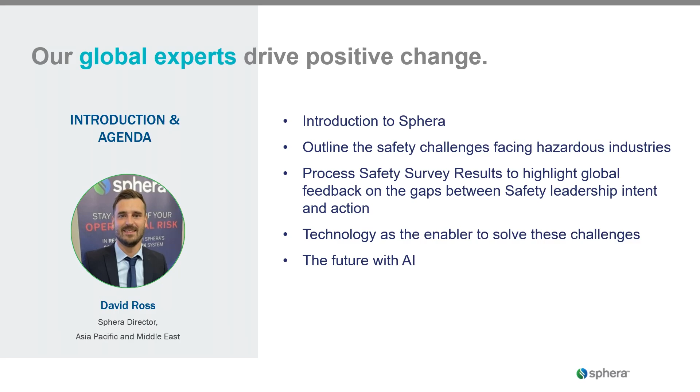And then, where our background is in technology, how we can help enable and address some of those challenges. And then where everyone's looking now, what's the future of process safety and AI? So I want to cover that.

So who are Sphera? Sphera is a leading provider of integrated operational risk and sustainability software. And we're not just a shiny software company. We also have a lot of people with expertise that have come from operations, maintenance, health and safety backgrounds, so we have a lot of data built into the software and services and consulting teams as well. We're not just a tech company, I guess.

So our area of focus: a lot of the companies you speak to here, and at this event as well, are around the maintenance and asset management side. We come at it from environmental health and safety into operations and maintenance. And so we've got solutions across all environmental health, safety, and sustainability, as well as product stewardship and chemical management, supply chain solutions as well for risk to supply, and also my area of focus, which is process safety management solutions.

So I thought I'd start with a quick reference to what is process safety. I'm sure you probably know this, but the Centre for Chemical Process Safety gives the definition of a framework for managing the integrity of operating systems and processes handling hazardous substances to ensure you apply good design and basically don't blow up your plants and your mines and your factories.

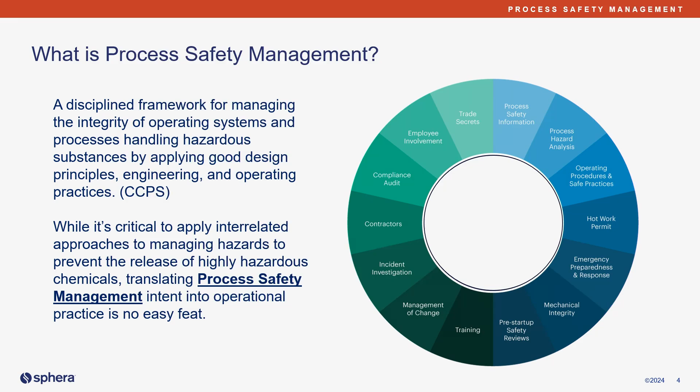So this number of elements changes depending on the institute. WorkSafe have theirs, NOPSEMA have their standards, OSHA, CCPS, Energy Institute. But generally, they form around these key components: being able to do proper hazard identification and analysis, standard operating procedures and practices, permit to work, managing the integrity and reliability of the plant, emergency response, MOC, incident, contractor management, and these are all themes you're seeing across the event, and I want to talk about today.

So the challenge is, though, when it gets into operations, everything changes, and I quite like the quote that since the day that you start operating, the last time you did a PHA or a HAZOP is already out of date. As soon as you get into operations, you start introducing preventative maintenance, critical break-in work, inhibiting safety critical equipment to do work in the site. Things fail, and you have to have management of change in place.

So things are always changing, and I feel we manage these processes in different places. Some on paper, some in point solutions, technology, and it means there's no real visibility across the operation and maintenance teams of what really the status is at any one time and what's the risk.

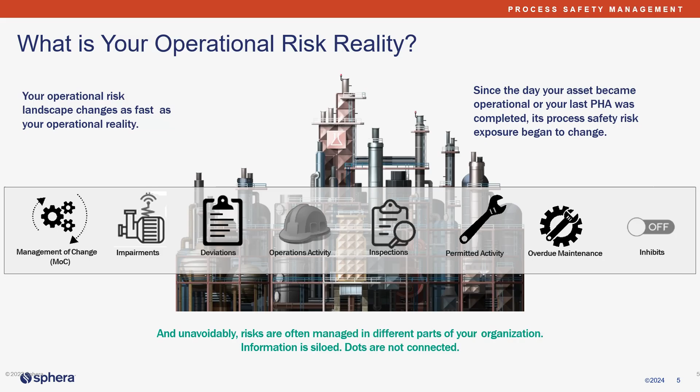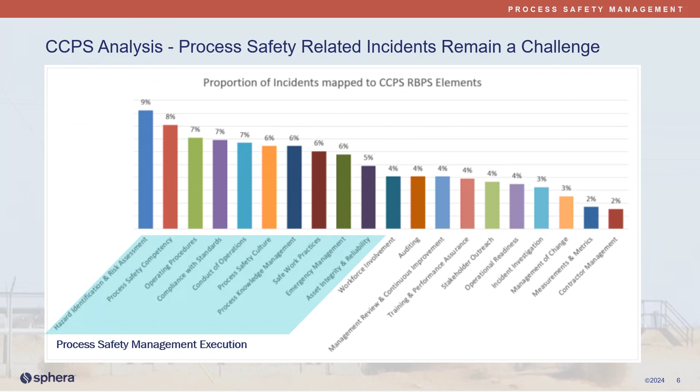So that's one of the challenges, and I was looking at the CCPS recent results that they'd put in terms of incidents and process safety incidents, and you can see in how we manage process safety some of the key factors that were found: hazard identification, risk assessment, so failures in that, in how we operate, competency of the workforce, safe work practices, asset integrity, reliability. So all of these themes we talk about, still we see incidents in this space, even with lots of technology and lots of things nowadays.

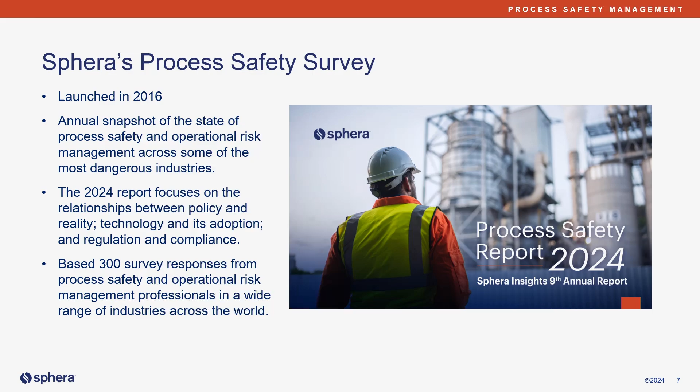Sphera, every year since 2016, have produced an annual report. So we interview hundreds of senior leaders within our client base across mining, utility, energy companies, oil and gas, petrochem, all hazardous industries, rail, and we get some interesting feedback, and over the years it hasn't changed a whole lot. What we find is that in process safety management, what we say we're going to do as an organization isn't then what we do in practice at a top level.

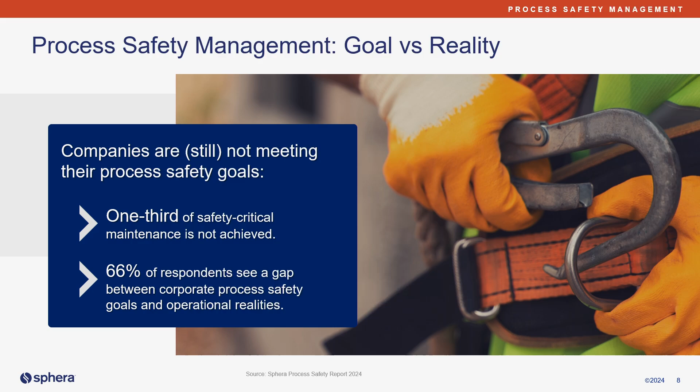So a couple of key highlights: 1/3 of safety critical maintenance is not achieved as a standard across what we heard, which is quite scary when you think about the hazardous facilities that we run, if a lot of the safety critical maintenance hasn't been done. And 66% of the respondents, so the majority, said that there's a gap between what their corporate process safety goals are and the actual reality in operations. So again, what we say we want to do is very different to what we do.

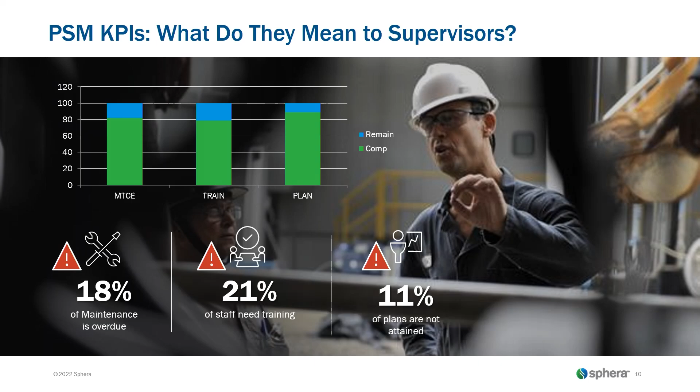And then if we take that down even more to the front line, the guy actually at the site, he might be out doing some hot work, spark potential, and he doesn't know that the gas detector hasn't actually had its maintenance, is overdue, or it's failed inspection. He might not be trained in the safety protocol during an emergency, and he's under pressure to perform tasks quicker. So very quickly, when you drop down a few levels, you can see that this is why we can potentially have incidents, because it's not as green as it looks from a top level.

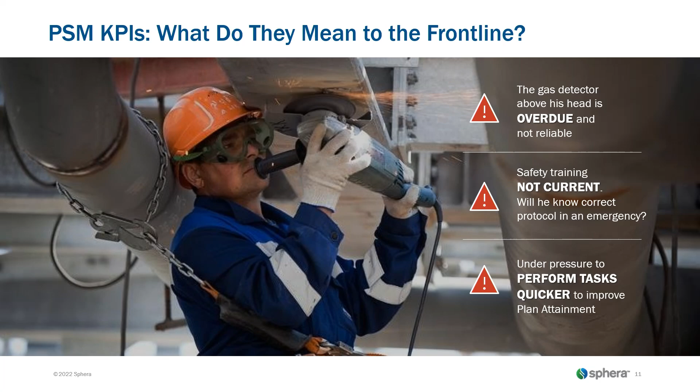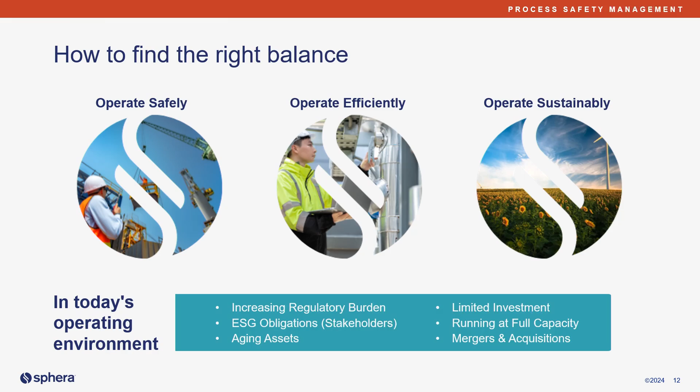And there's lots of reasons for this, and part of that is trying to find a balance between making sure you're producing all the time, I guess the main one, but then operating safely, efficiently, and sustainably. And the challenge in doing that is today's environment. We've got aging assets. There's this whole skills gap with lack of investment, and lots of experienced people leaving, new employees coming in, and trying to capture that knowledge. There's lots of mergers and acquisitions across all the industries, which brings its own challenges across data and systems. And increasing regulatory burden. So things are running at full capacity. It's not easy by any means to manage this.

Some of the key factors within our survey we found when it comes to what causes risk to increase in your plant: I mentioned loss of experienced personnel is a key one. Trying to capture that knowledge and retain it is a challenge. Conflicts between procedures and frontline work, inaccurate standard operating procedures, and even cost pressures. So having the right equipment at the right time are all challenges from a safety perspective.

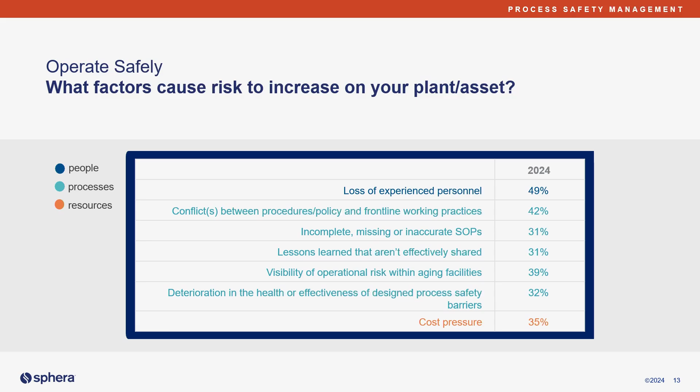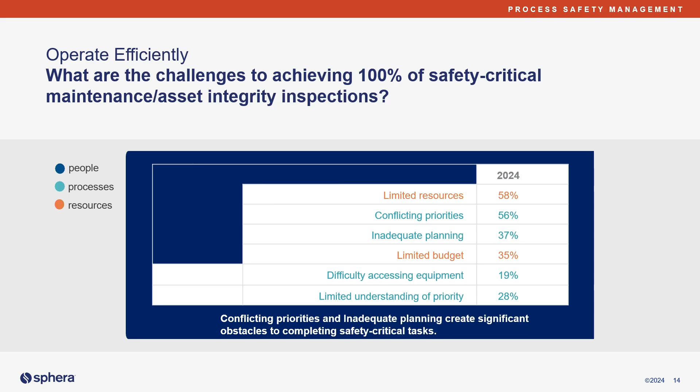And similarly on the efficiency side, how do you achieve your asset integrity inspections and keep your maintenance up to date? And again, a lot of the challenges around limited resources and budget and conflicting priorities can all add to this challenge. And then the last point is around sustainability and being able to manage things. This has obviously been a fairly hot topic around ESG, and a lot of people say that process safety remains an important part of that. And it can impact the company's performance from an environmental standpoint if you have a safety-related incident or you're not governing how you manage these processes.

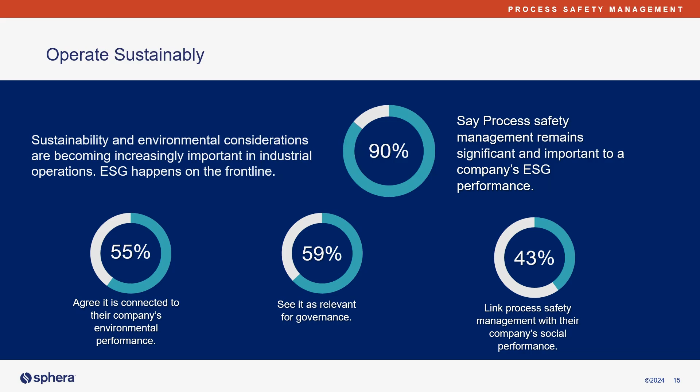So what do leaders do, and how do we try to move you towards a better situation? One thing we often see is there's a resistance to digital, and companies remain more reactive. They don't have real-time indicators or visibility of the status of the plants and the maintenance and the activities that are going on. So trying to move to more predictive and preventative with digital, so that you can get that visibility and have the right data.

Things are often managed separately in different fragmented systems or on paper. Lots of companies don't necessarily want to go to enterprise platforms. They stick to what they know and some of the tools they have, and that just causes some fragmentation and the need to integrate lots of systems. So trying to standardize an approach with software helps to streamline and make it more efficient, so that it's less costly to manage your operations.

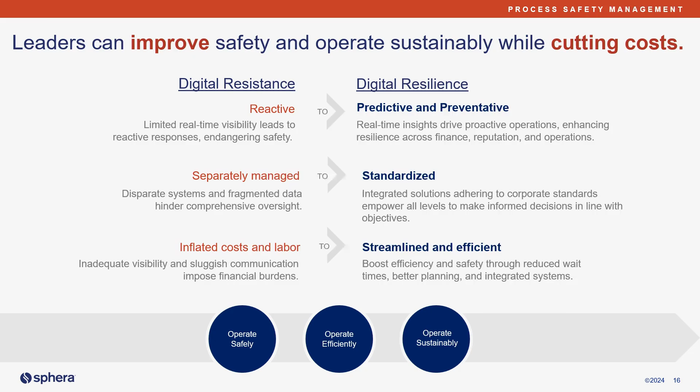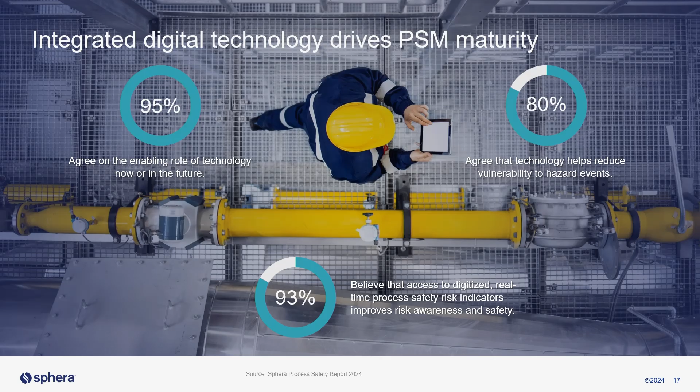So integrated digital technology, and again, this is one of the questions we raised in the survey, and most agree that technology is going to help in the future, and it can help reduce your vulnerability to major hazard events by having the risk indicators and better visibility across the organization.

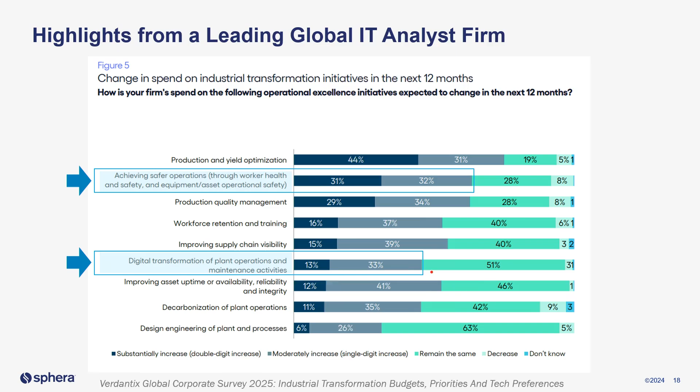So those are key things that organizations are trying to improve on, and I'm seeing that a lot. That's why I'm here as well with some of our customer base in Australia and New Zealand and the region: most companies are now trying to digitize in this space. It seems to be growing, especially when it comes to software and process safety management. I was just chatting to the gentleman from Rio Tinto, looking at digitizing process hazard analysis, for example,

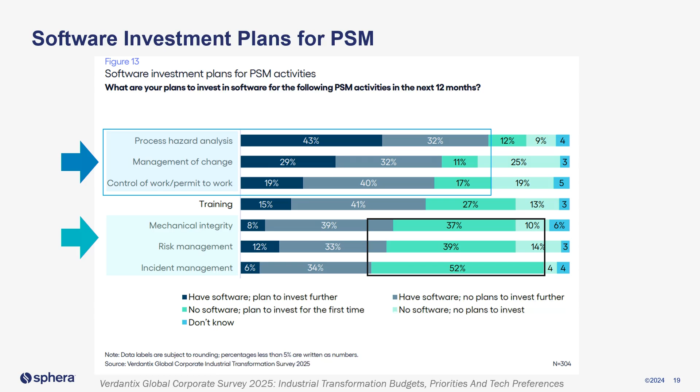like all your HAZOP, LOPA, managing that within an enterprise platform, management of change, and permit to work, control of work, where lots of companies are still managing on paper, with contractors coming to site. You don't have full visibility on all the work site activities. There are still other areas with gaps and no software, even around mechanical integrity, risk management, and incident management, where they're planning to invest. So that's starting to grow as well. These were some of the findings of this company.

So how do we achieve it? This is what Sphera does, and how we can help support across what we call the four pillars of integrated risk management. First of all, identify and assess the risk: across your facilities, being able to understand the potential failures, the major hazards we need to manage, and the consequence, likelihood and mitigations we need in place, and understanding the status of that in real time. Once you've identified the hazards and move into operations, being able to actually manage all those operations.

So right the way from digital permit to work, lockout tagout, managing shift handover, even looking at the safety critical equipment status, and understanding all of that. And then controlling and mitigating any changes: emergency response, management of change, pre-startup safety reviews, all of these things. And then lastly, more predictive but looking backwards as well at incidents, trends and auditing, to make sure that you're continuously capturing lessons and improving and feeding that into the future.

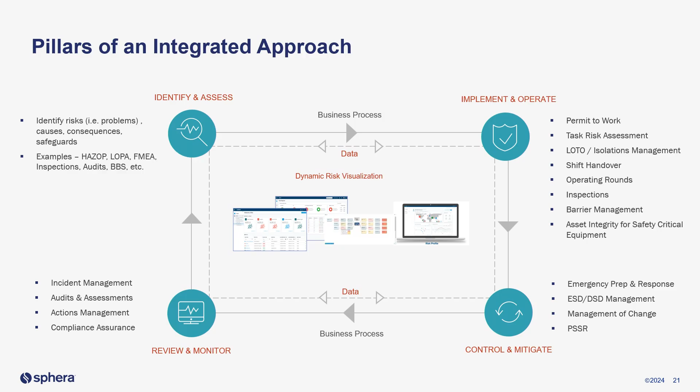So these are kind of the main pillars, and to give you a practical example, what we call a connected plant. One thing we've been doing is looking at the sources of data for most of these things, so you have your data historians, your APM tools, like Hexagon downstairs, and companies managing the integrity operating windows of your critical equipment. We have the data, but it's rarely linked to the major accident hazards and potential failures.

So it's more from a predictive maintenance and risk focus. We also have management of change, so we have systems and tools that manage that process. We manage the inhibits and deviations on the plant at the site, and all the inspection data we store, so we know when things are overdue and know when there's potential failures, and we manage all of that alongside all the permitted and operational activity going on.

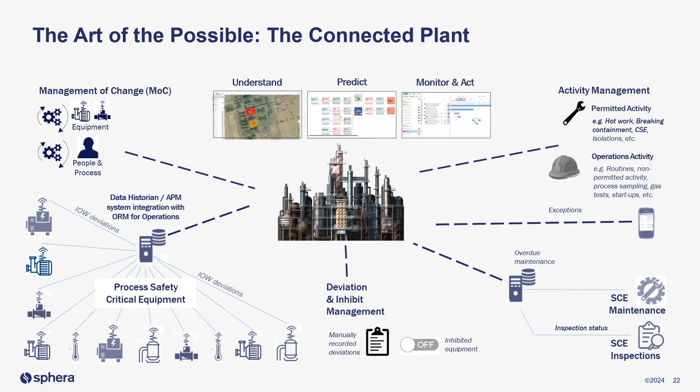So all of these things are managed, and having an actual picture of this is something companies struggle with. This is something we've introduced, where we can give a real-time view by connecting all this source data and looking at it from a major accident hazard dashboard of fire, loss of containment, for a particular unit, and even at a higher level, what is the risk to my equipment and scenarios, and what barriers do we have in place, not just whether they're outside their operating window and failing.

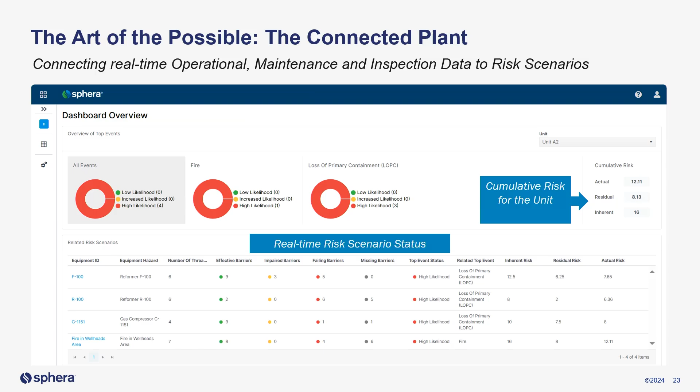We want to know things that are effective as well, and really understand what is the inherent risk, the residual risk, but more importantly, based on these failures and missing barriers, what's the actual risk to the site, and then roll that up across the unit and across the plant to get visibility on the potential for an incident, a process safety related incident, in this unit or area.

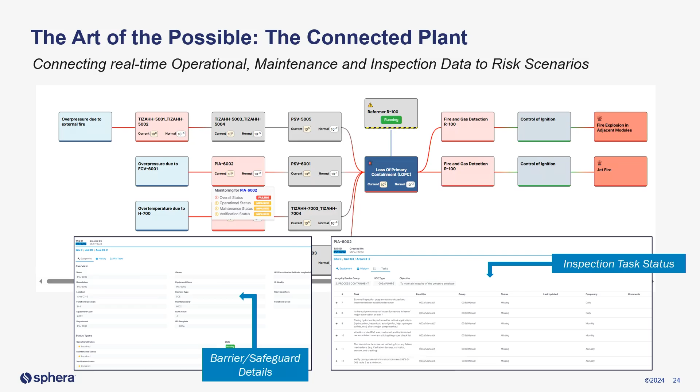We can take that further, even looking at it from a bow tie perspective, and start to understand - I want to see real-time status based on the operational status, the inspection, overdue maintenance, so I can start to understand the real potential for this kind of loss of containment within this reformer. Again, you can drill down and capture some of that underlying detail within the system. So that's just one example.

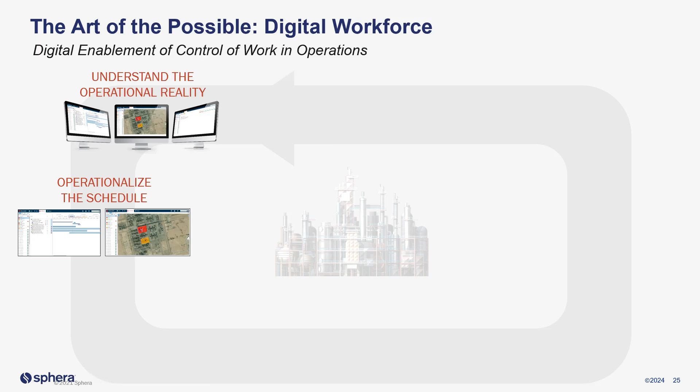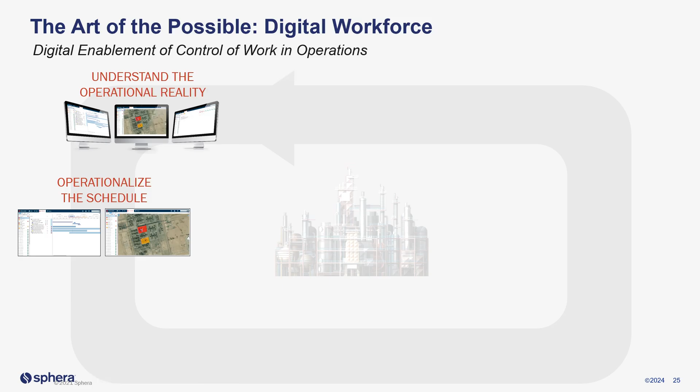Another thing we do is look at digitizing the workforce and managing this. So how do we help the operations and maintenance teams understand this reality, first bringing in the schedule from SAP, Maximo, work orders, pulling them in, but looking at it from a risk perspective. What potential is there for hot work happening alongside breaking containment? Where's the conflicts, and do we know the status of the safety critical equipment in the area? How do we standardize the practice as well?

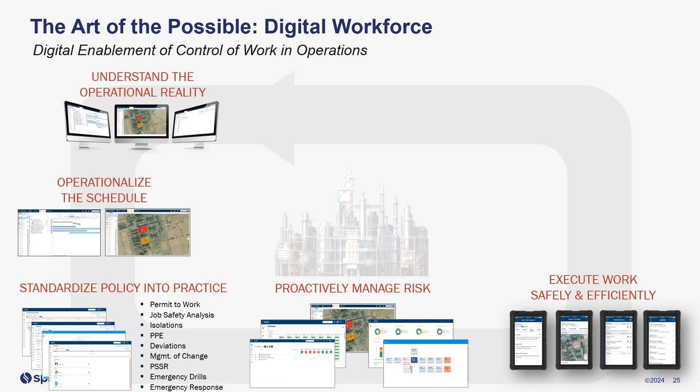Just managing and digitizing this is an area lots of companies are working on now, to try to digitize these processes, to get more streamlined and efficient in how they do things like JSA, job safety analysis. We have software to help standardize that and proactively manage risk with this as an input. All of this is mobile enabled, so being able to do all this at the site, with offline capability to manage the work effectively, do gas testing, confirm isolation points, lockout, tag out - all of that can be managed within a system.

I'm conscious because he's holding up ten minutes.

Structured handovers, and then support things like lessons learned - capturing if something happened on that particular permit, isolation, equipment, or location. Next time we do work here, I want to see a prompt and understand if a lesson was learned. This is where we need to capture some of the experienced personnel moving off site. If we build a library of lessons for the new generation coming in, the software will start to inform them and keep that knowledge within the system.

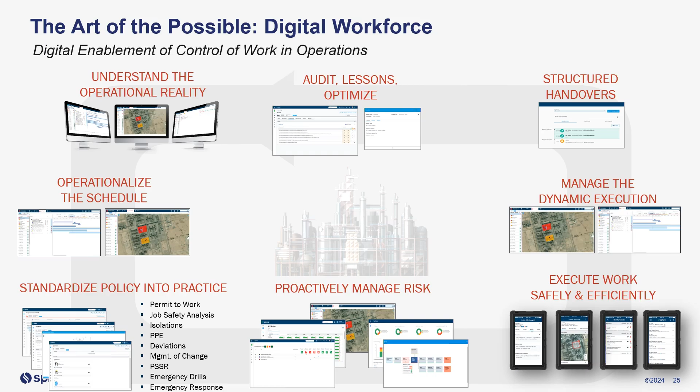So now I'm jumping to my AI slides, which I added at about 2 a.m. last night with jet lag. I wanted to touch on AI because I know lots of people are saying, well, this is great, but where does AI fit in all this? There's a number of use cases we're looking at in our software space, and I talked about permit to work.

Can we use it to pre-draft the job description, the standard operating practice, and can we augment our risk assessments for the HazOps? Can we pull data from AI to tell us this? Even incident prevention, can we get predictive and help use trends? And even from spares data, having the right equipment at the right place, can it tell me all of this? So these are the areas that we're looking at.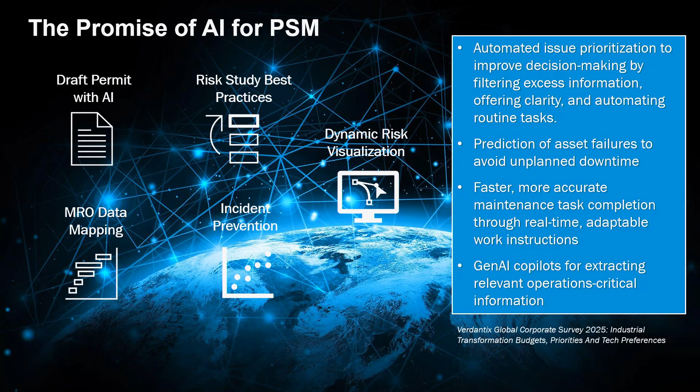When I looked at the Verdantix studies around this, as well as this global IT company looking at it, they said similar stuff. It's all around automated prioritization and decision making when it comes to automating routine tasks, getting more accurate maintenance task completion and work instructions, Gen AI co-pilots for critical information for operations. These are all the things that they're talking about.

But there's barriers, and I think this is important to highlight. I feel everyone just wants AI to solve everything, but my focus is to say I don't think we're quite there, because at the foundation level, a lot of stuff's still on paper in a lot of companies, and poor quality data or incomplete data will generate lack of trust in what's actually coming out and helping you make decisions.

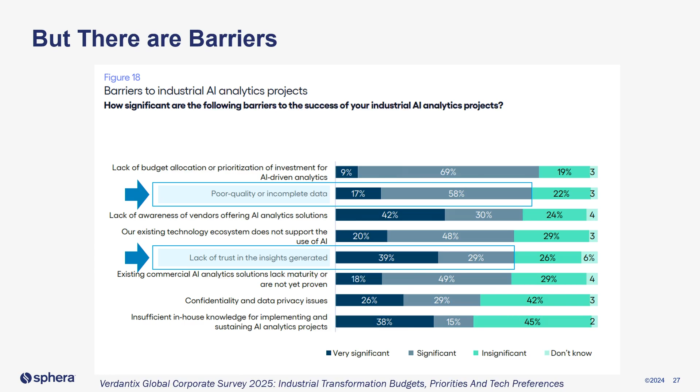So it was interesting seeing that, and I quite like this slide. If you think about trying to use AI where there actually is insufficient data or human guidance for it, it might be inaccurate, inconsistent, not telling you the right information, and that can actually lead to a lot of noise, and it could end up overwhelming operators and people who just don't know what the status really is and don't have the right information to make decisions.

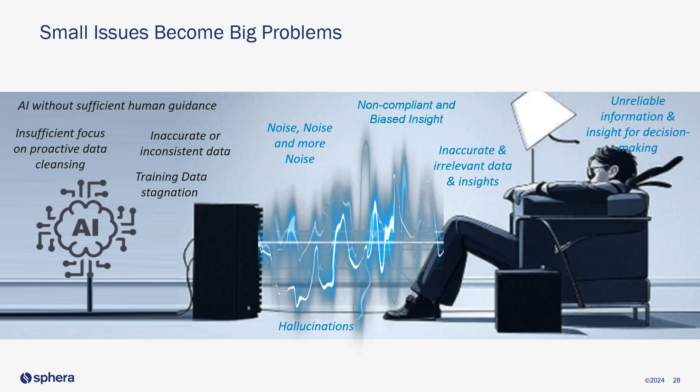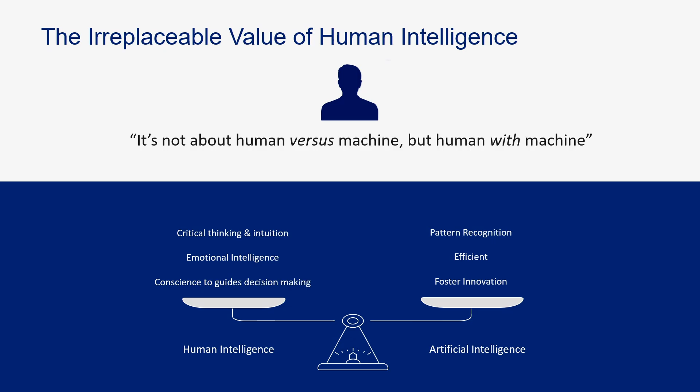So I think we have to take steps towards this, and I really like this quote, which is, it's not about human versus machine, it's human with machine. We can't replace the human intelligence side of it. We have to be looking at it from a conscious decision making, critical thinking, human operator who understands how the plants run. It's great that we get trend pattern recognition and it'll inform you with some of this predictive AI, but it needs to be a balance of the two.

Last point before I wrap up. I like the idea of augmented decision making. I think we can't go machines alone, autonomous decision making, particularly around safety and reliability in the plants, because I wouldn't want it to tell me that I'm safe with a lack of data. But it can definitely support us in the decision-making process.

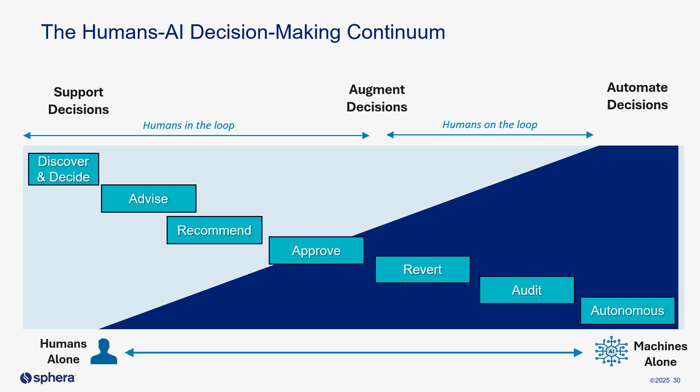I think augmented decisions alongside AI, there's definitely use cases throughout what we're looking at, but I would just add that caution. The data has to be there and correct before we can go to that level of automation. So that was really my key part of the speech.

Hope I'm on time. All good.

Some of my key takeaways: I think the importance of resilience of using digital tools. There's still lots of challenges that we see in this space, and digital tools can certainly help. Enterprise platforms, technology is an enabler for the workforce to get the right types of work done at the right time, in the right place. And I do agree that AI is the future, but I think it needs to be utilized in the right way to augment human decision making.

I think there's certainly use cases, but I would just add a word of caution after all the AI chat this week. And yeah, we've been doing this with lots of companies.